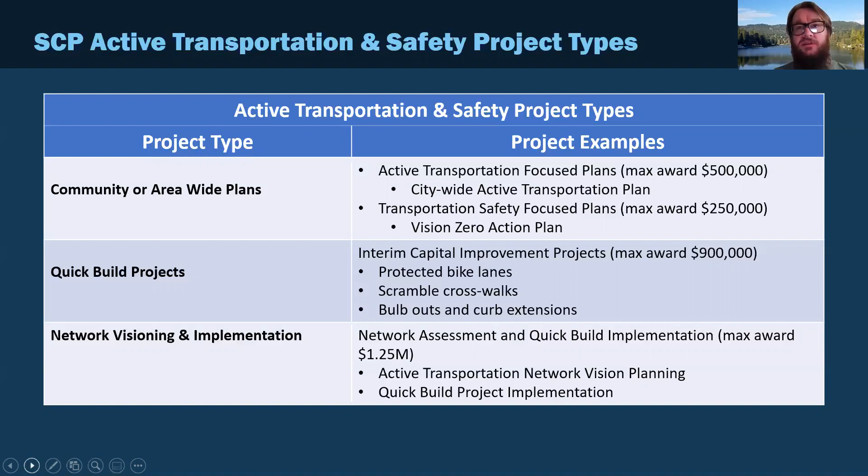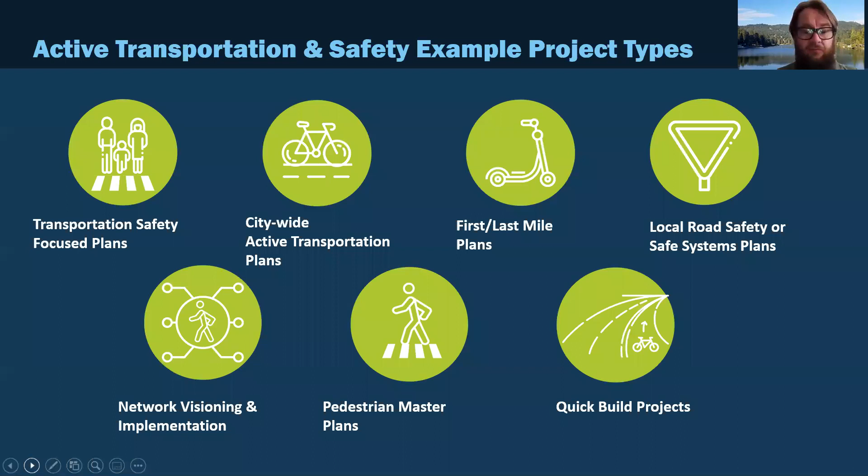These are some of the types of plans we might expect: transportation safety focused plans, citywide active transportation plans, first/last mile plans, local road safety or safe systems plans, network visioning, pedestrian master plans, and quick build projects. Next slide.

Nonprofit organizations or community-based organizations are not eligible to apply directly. However, they are definitely encouraged to partner with one of the eligible applicants in pursuing funds. We do like to see applications that include community-based partners on them.

The online form will take approximately 45 to 60 minutes to fill in once you have all the content prepared. In addition to completing the online form, approximately 8 to 12 hours of commitment are needed for developing all of the attachments and so forth. But we do anticipate that this is a relatively easy application to fill out, especially compared to other applications like the Active Transportation Program. That was really our goal with this.

SCP does use ATP funding. As such, we will consider ATP Cycle 5 submitted applications that were not selected for funding at either the statewide level or at the MPO level. However, our program does have different scoring criteria and different focuses.

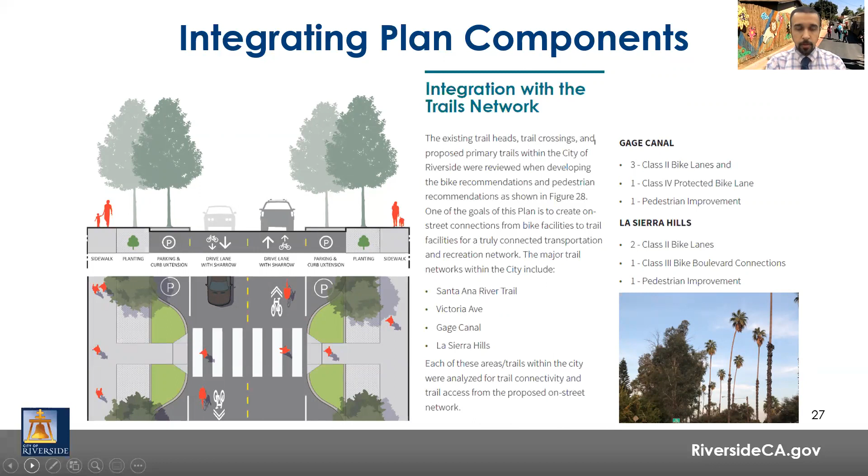It really just encourages parking lots and people parking in residential areas to get to an area where they can walk. While we certainly want everyone to enjoy our trail network, we want to make sure it's accessible for those living near it or those who might use it as a link in their commuting network. There's also a little graphic from our Complete Streets Ordinance there as well.

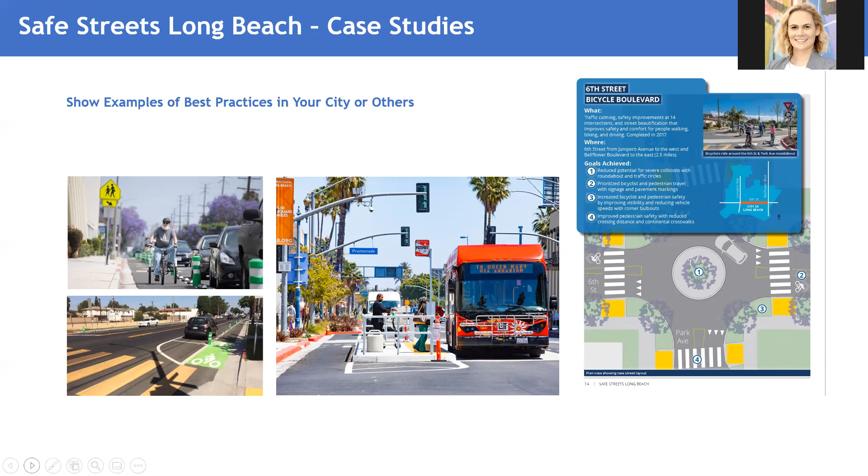So getting to the multimodal nature of this plan, we didn't want people to think this was a bike plan or a ped plan. We wanted to really get at the point that this is safety for every road user. That can be a tricky thing to navigate too, so I can't stress enough that this is a plan for everyone that uses your transportation network. Next slide.

And this is our high injury network, our corridors and intersections. We broke ours down into, in red, our ped and bike corridors and intersections, and in the yellow color, that's our motorcyclists and vehicles. Some people break this down differently, but I think this worked for what we were working on.

We have this map again in the plan overlaid with our disadvantaged community overlay. We talk about how 73% of the corridors are in disadvantaged communities, and 83% of the intersections, really using that overlay to show where we're going to prioritize our next step projects.

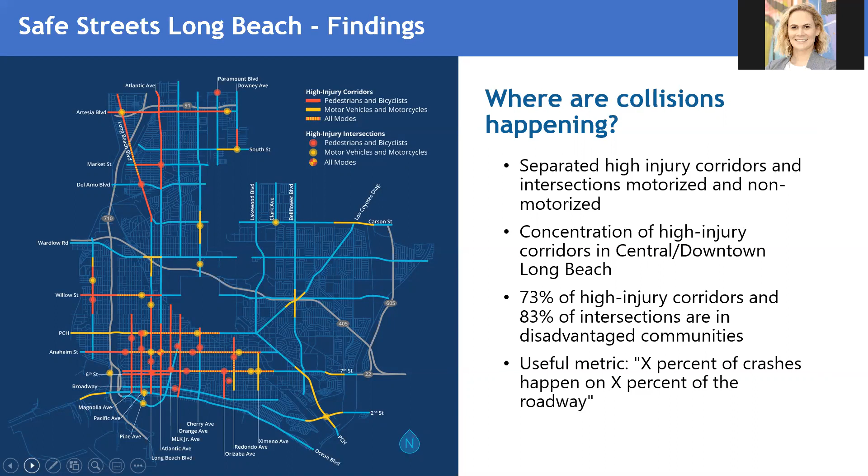One metric we don't have that I think is really useful is X% of crashes happen on X% of the roadway, getting at the point that so many of our crashes are happening on just a handful of our roadways, primarily arterials. I think this is beneficial for the public as well, to get a better understanding of what streets really need to be re-examined. Next slide.

Number 2, speeding. We captured everything to do with speeding under this, including design, and laws we want to change at the state level. We really wanted to get at speeding as one of the primary culprits of these issues, so we tried to stress it as much as possible in all our materials.

Number 3, street design, pretty straightforward. Number 4, more education, really focusing on more driver education too going forward, not just walking and biking education. Just because there's a rash of bike-related collisions doesn't mean you should only target education for bicyclists. Number 5, data.

This came up a lot, and this really refers to not just PD-related data in the Form 555 and collision-related data. This also refers to before and after data for our projects, making sure they're reaching the goals we're stating at the onset, and using data to showcase to the public that these projects, which might inconvenience drivers, are worth it in the long run.

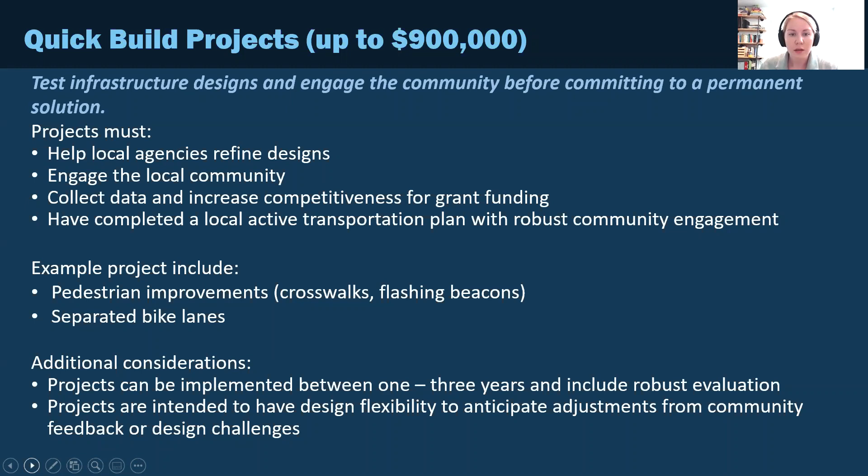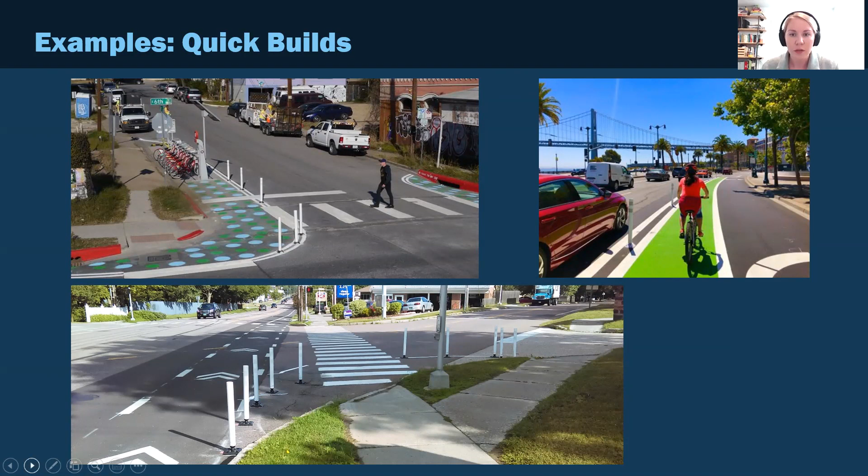Here's another example of a parking protected bike lane and a creative use of planters.

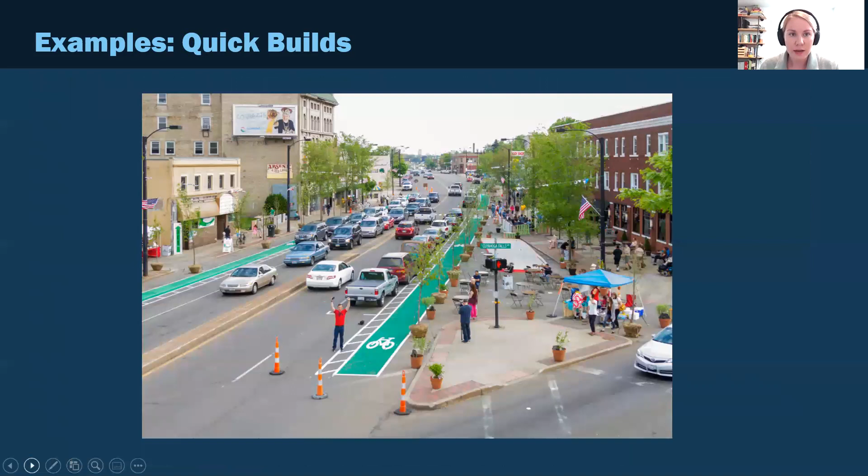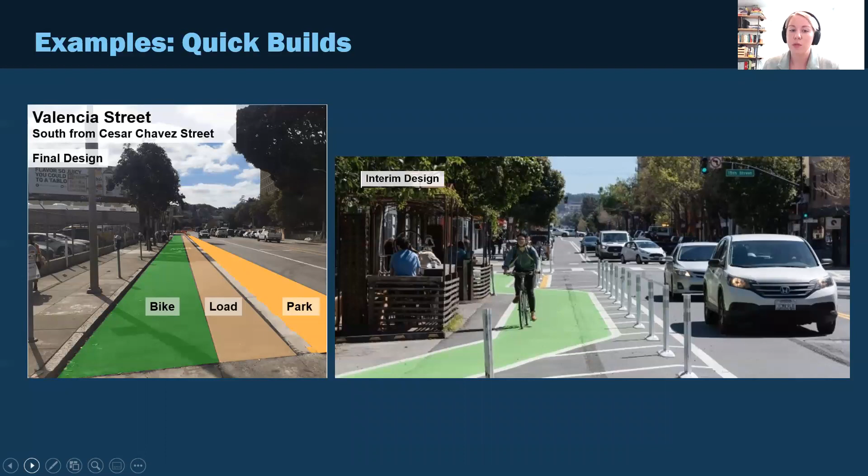Also an example of how you can do an interim design prior to construction to test out a project, to evaluate that design and gain community feedback that can lead to a permanent project. Now I'd like to introduce Eric Ceja from City of Palm Desert to talk about their project and how it led to permanent construction.

Hi, good afternoon everybody. As Hannah mentioned, my name is Eric Ceja, I'm with the City of Palm Desert. Today I want to talk to you about our San Pablo Avenue improvement project and how SCAG's Go Human campaign really helped get this project off the ground.

The impetus for all this is back in 2015, the city was undergoing a comprehensive general plan amendment, looking at what the next 30 years of this city looks like. Palm Desert is geographically the center of the Coachella Valley, halfway between Palm Springs and the city of Indio. Most of the city has developed with gated private country club communities, and the community itself is rather affluent and older—median age is close to 60.

During that general plan amendment process, there was a real emphasis on how to bring this city back together, how to identify a city center where we can hold events, really create a downtown for the city that can bring back the civic and cultural life to the city itself.

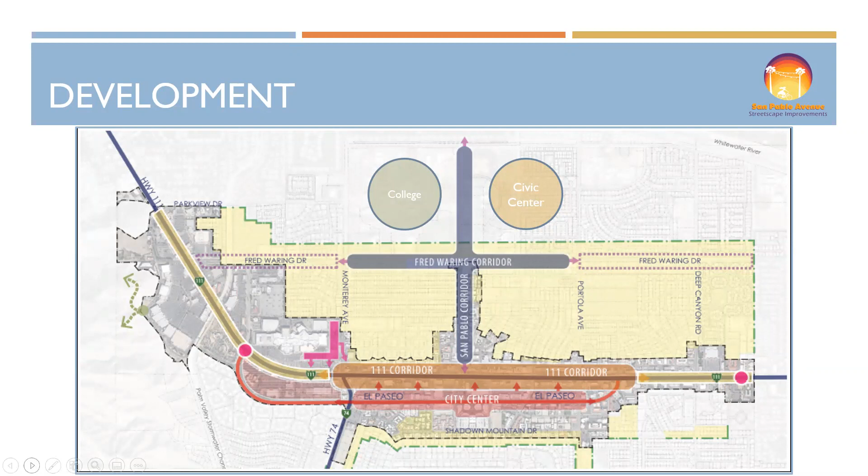In starting to plan out some of this work, it became self-evident that San Pablo and its intersection with El Paseo, Highway 111, and its connections to the Civic Center and College really identified itself as the center of town. The yellow portions on either side of San Pablo are actually neighborhoods that are part of the original city layout from the 1950s. It's really an eclectic neighborhood mix with single family homes, apartment units, and duplexes. This is really where we have our most diverse housing stock in the city.

As I mentioned, in 2015 we started this general plan update. We identified San Pablo as the city center, and we started to think about what that actually meant. What does the street need to establish itself as a downtown street? How does it bring people to this area? At that point, we were able to partner with SCAG and their Go Human campaign.

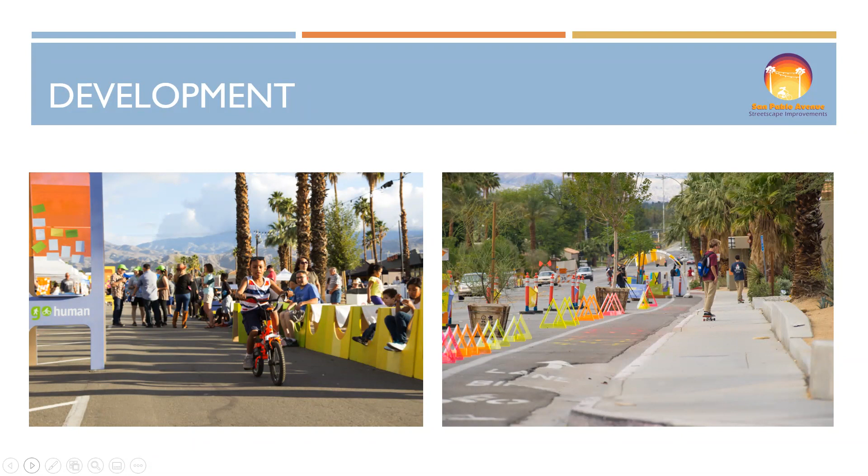One of the things that was provided by SCAG and Go Human is in that left photo there. We were able to take surveys - you can see little postcards that are tacked to that board. People are starting to share their ideas and their support for the project itself.

This is more photos from that day event. The photo on the right kind of shows you what that event day looked like with our cones, temporary trees, and artwork that were in place.

What this project actually helped us to do, and what helped the city council see, is that there was a lot of support to really reimagine the San Pablo corridor. A road diet project was not something the city had attempted before - most of our projects are to expand right-of-way, so a road diet, actually taking a vehicle travel lane away, was something new. But the Vision San Pablo demonstration allowed the city council to see that there was support for this idea and to start working towards an end goal of actually making it a reality.

One thing I wanted to highlight is that from the time we were participating in the Go Human campaign back in 2016, there was a lot of work that went on beyond that to make it a reality. So if you're working on a Go Human campaign, it's really helpful to get community feedback through that process and let your electeds see that there is community buy-in for a project like this. Also be patient if you're a staff person - these things do take time. But ultimately, we were able to complete phase 1 of San Pablo earlier this year.

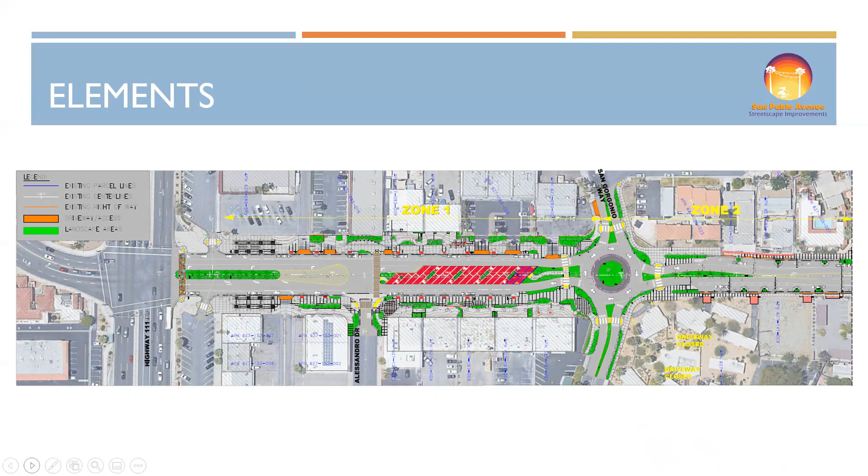This just showcases how it moves through the neighborhood, including a mid-block crossing between Catalina and San Nicolas.

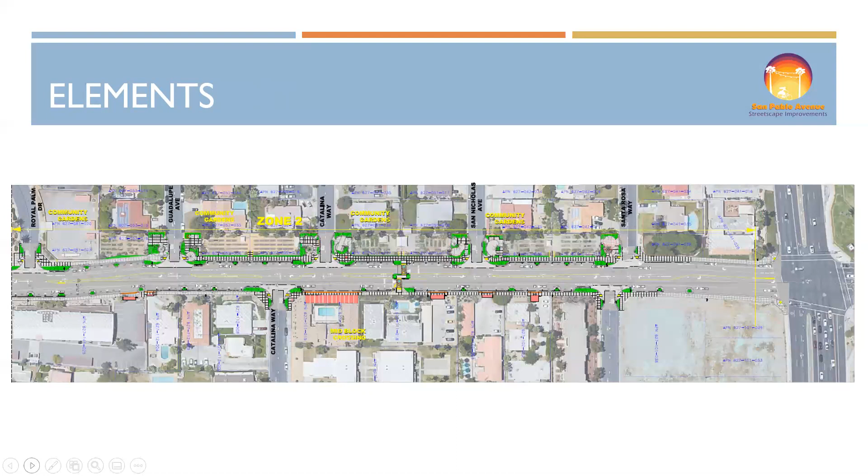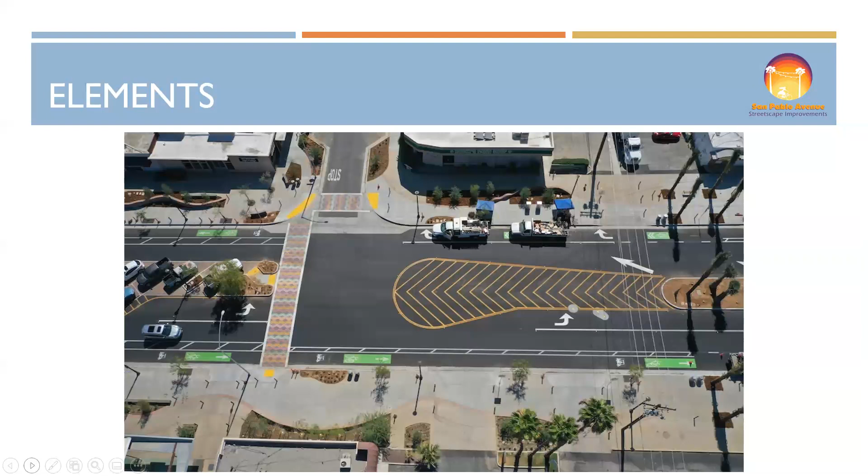As well as some of that center parking that is in the middle of San Pablo. This is just featuring the parking that was placed in the middle. In this particular location, there was on-street parking already provided for the commercial businesses, and that parking moved from the edges of the street towards the middle.

This was an attempt to really slow down vehicle speeds through here. One thing that was not ideal in the previous San Pablo configuration is that when vehicles were parked against the curb, they would actually back out into the bicycle lane, creating a conflict there. So by providing the parking down the middle of the street, you no longer have that situation where cars have to back into the bike lane. It also helps the other drivers using the street to really slow down through this part of town.

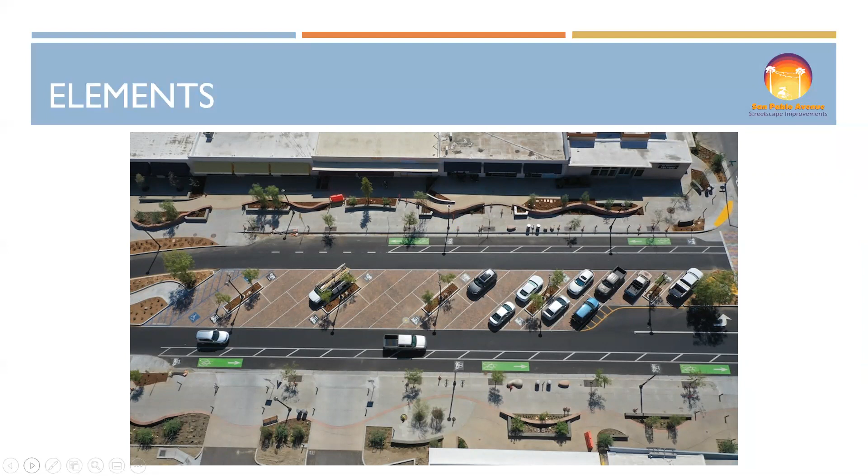So we're just moving further north on the street. These are again the completed improvements. This is near the mid-block crossing between San Nicolas and Catalina. Along the western portion of the street, there were existing community gardens, and we were able to provide some enhancements to those as well. This also shows not just the mid-block crossing, but on both the north and south side of the community garden, we're able to turn these former parking areas for the garden into pocket parks, essentially.

Each one has its own theme. The one on the left shows you a pocket park theme that includes a putting green. I think the one on the right is actually a bocce ball court. On another one of those parking areas, we actually have some musical instruments. We have chessboards out there, just a whole range of new amenities for that neighborhood to enjoy. This picture also highlights some of the bulb outs that we provided at each intersection, as well as some of the planting areas that now encroach into San Pablo, and the on-street parking configuration that's there now.

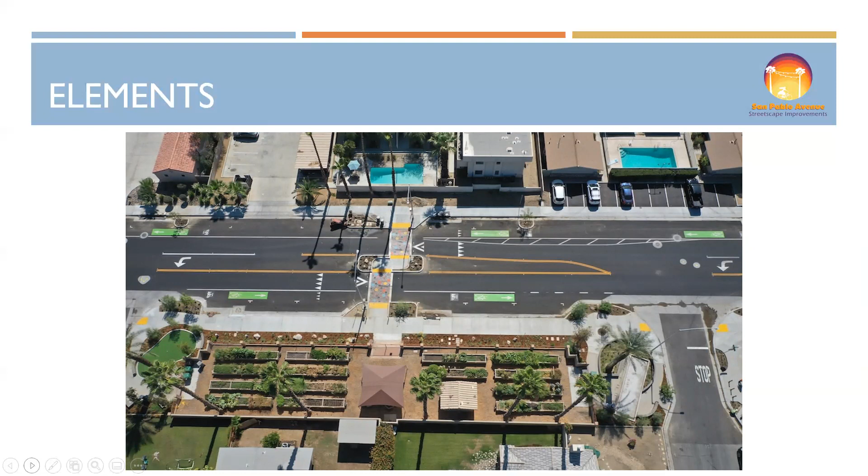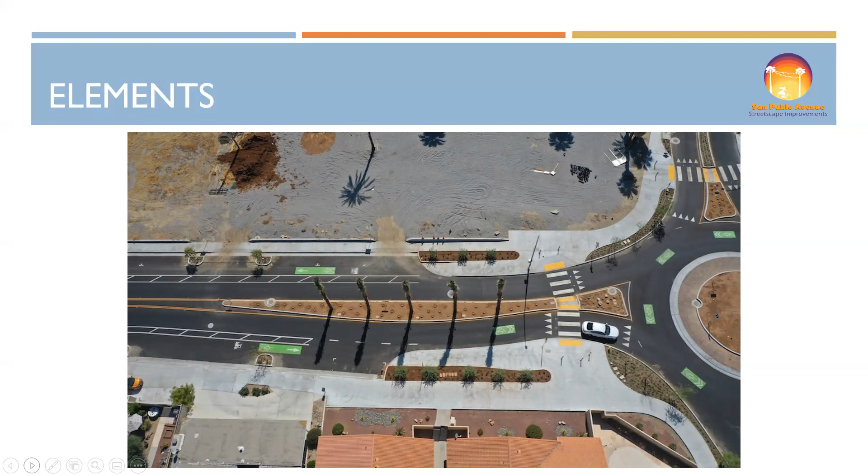So let's look at the next slide. This is just showing leading into the roundabout that is now there at San Gorgonio.

There's been a lot of support since we've completed phase 1 of San Pablo, and phase 1 is just the half-mile portion between Fred Waring Drive and Highway 111. Later this month, we'll actually begin phase 2 of San Pablo, which is north of Fred Waring and connecting to Magnesia Falls.

At that intersection, San Pablo will connect into the Coachella Valley's CV Link system. This is a regional trail that runs from Palm Springs to Coachella. It's over 50 miles in length, and San Pablo will have a direct connection into it, including a cycle track along the western portion of the street that connects to the cycle track that is CV Link. So again, Go Human was instrumental in helping this project gain support and community feedback, and ultimately the council was confident enough to program money to make these improvements permanent.